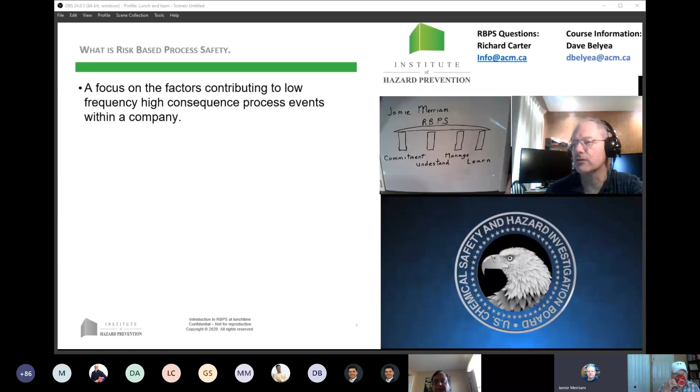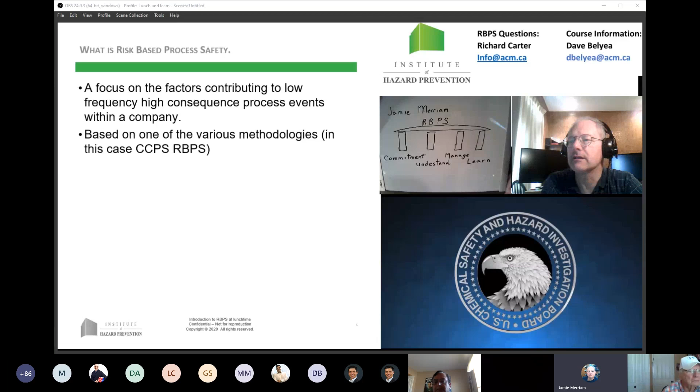Based on one of the various methodologies, we will interpret that risk. The one we're going to be using, or focusing on, is CCPS's risk-based process safety, but we'll be talking about other methodologies as well.

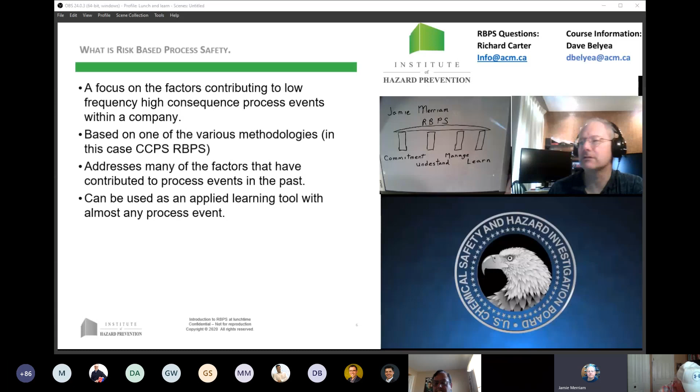We're going to address many of the factors that have contributed to process events in the past, and this can be used as an applied learning tool with almost any process event. What I'm trying to instill here is that taking some of these learnings and applying or interpreting them for your own use is highly encouraged. We want to make sure that we give process safety management leaders within companies the tools to help change the culture. That's really one of the key focuses of this Lunch and Learn session.

So key learning number one: most companies already manage some of these activities in process safety management. Sometimes they're called process safety elements, or elements.

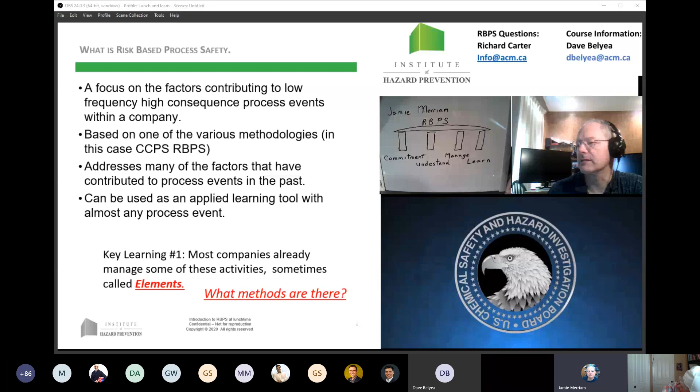Let's talk about those methods. The first one we're going to talk about, the structure, is the Guidelines for Risk-Based Process Safety from CCPS, or Center for Chemical Process Safety. I'm glad they have an acronym, because trying to say that quickly is very difficult.

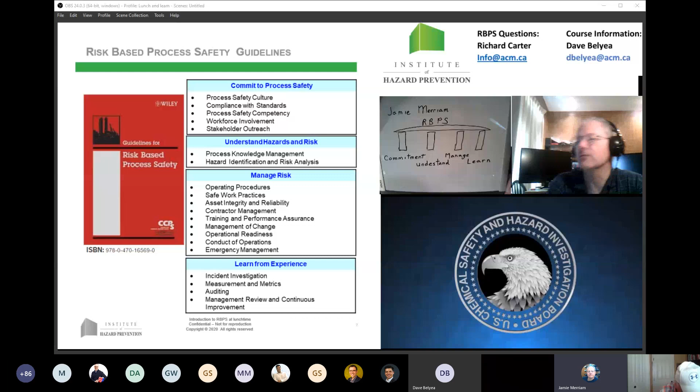There's two important learnings there. One is that using any of these methodologies, one can still implement good process safety management, and manage process safety within their facility effectively. It doesn't require, or I wouldn't say that RBPS is any better than OSHA 1910. So much of it is how you implement it within your facility. But don't be afraid to learn from various methodologies in order to enhance your layout of process safety management.

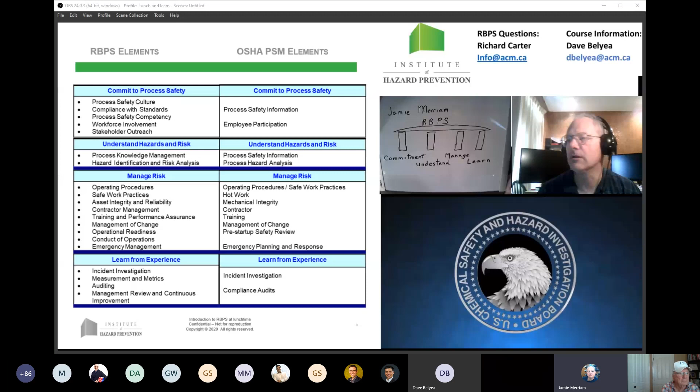If you're on the European side, you may be more comfortable implementing something like Seveso, but the results that you would get would be very similar to the other methodologies.

So safety case, as I mentioned, is commonly used in offshore facilities. I used to work on the East Coast, and this was something that was approached when we were looking at the deployment of the Terra Nova.

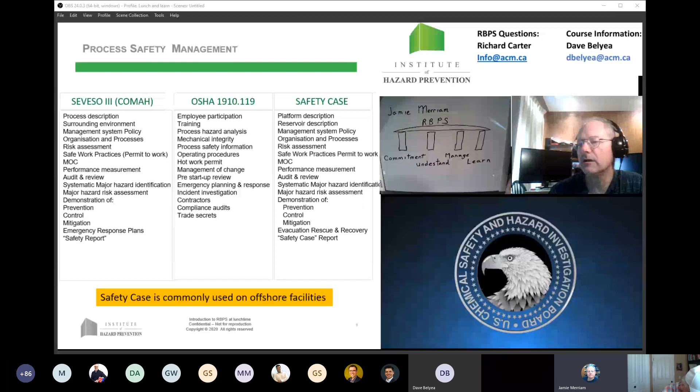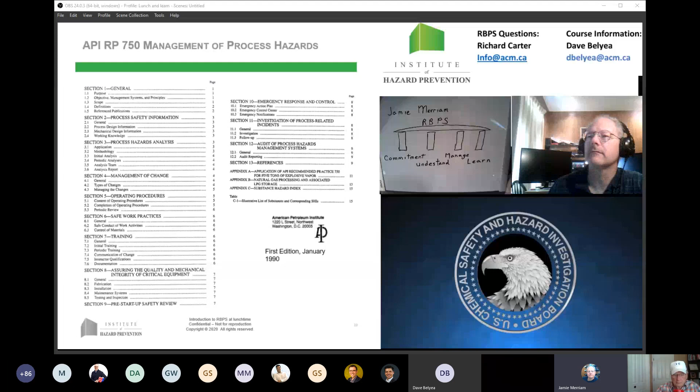Now, stepping a little closer to home, in Canada here, back in 2012, we saw the process safety management standard being deployed by the Canadian Society for Chemical Engineers. Not long after, we came out with CSA Z767-17. This is the, what do you want to call it, model for Canada.

It does parallel very closely with the risk-based process safety structure, and I'll be talking about that in a few seconds. But the key point here is that there's four pillars, which we touched on before, and which we'll get into more detail now.

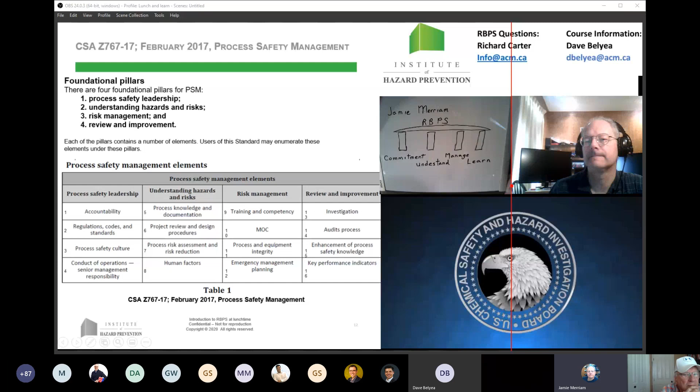When we look at risk-based process safety versus CSA Z767, we see that they are very, very similar. So one of the takeaways from that is that the publication for risk-based process safety is an excellent reference manual for some of the application of Z767.

Okay, now let's get into these pillars that I was talking about before. There's 4 pillars: commitment, understanding, managing, and learning. I really enjoy talking about this in this structure because this is a wonderful baseline for management discussion. Okay, we're talking 4 sets of deliverables.

Each deliverable has sub-deliverables. So if we can show how we're improving our commitment, making sure that we understand and manage the process risks, and learn from any occurrences within our facilities, we are going to be enacting very effective process safety management. Okay, now I've just shown you 4 pillars that look like they're made out of rock or something like that. What do we do with that? Well, let's talk about it.

Okay, first one, culture. My second favorite topic, but this one's worthy of a story. I'm also a tradesman, and at one point on the East Coast, we had a shortage of manpower because of things going on in other facilities. So I actually had to throw off my engineer's hat and throw on my tradesman hat and go out and work on the platform, or the FPSO, for a couple of rotations.

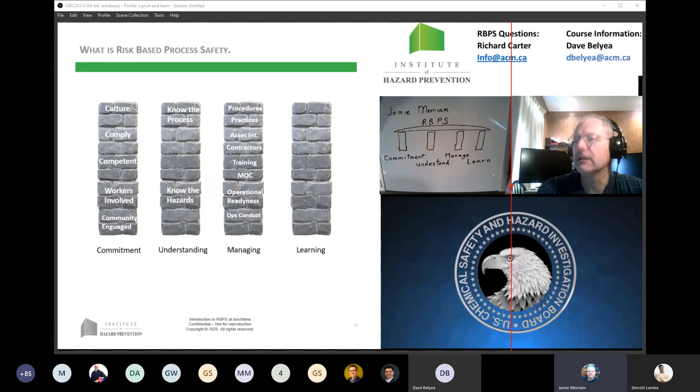Operator conduct means acting in a professional manner, but also knowing what to do and when to do it, and continually drilling this skill so that operators have the ability to know what to do when things are operating normally and what to do when things go off the rails.

All right, and I think there's one more.

Emergency response. When things do go wrong, both operations and maintenance people know what to do and how to respond. In a lot of cases, some of your maintenance people will also be first responders, so in the event of some type of emergency, they will initiate their response procedures and prepare to fight whatever problem there is.

Okay, and the last one. I talked about culture being my second favorite. Auditing is my absolute favorite, and it's not because I've got problems mentally.

Auditing to me is a tremendous way of having the ability to score how we're doing. Auditing says, how are we doing? What do we do next? Everything I'm going to talk about below auditing in this pillar is driving towards correction based on some type of investigation. And this should never be dealt with as a negative.

When I'm involved in auditing, I want to go in, interview people, and I want them to come out of that audit and go, wow, that was pretty good. And then when they see the results, go, oh, he's telling me how to do what I'm doing right, better. You always want people to be very forthcoming. You want to know what things are really operating like and find ways to improve.

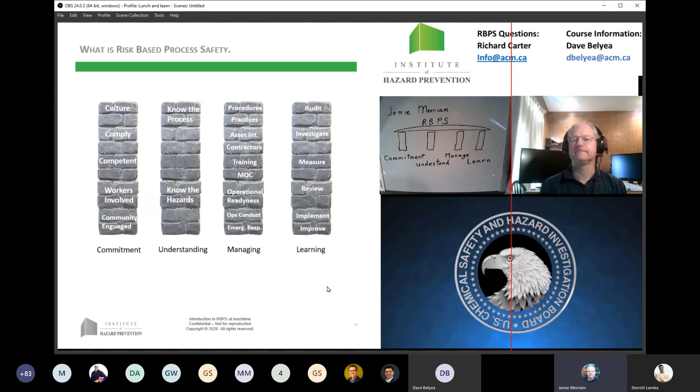Key learning number 2: risk-based process safety gives us the ability to know what is important, what you are doing right, and how to improve. That is really what the goal is here.

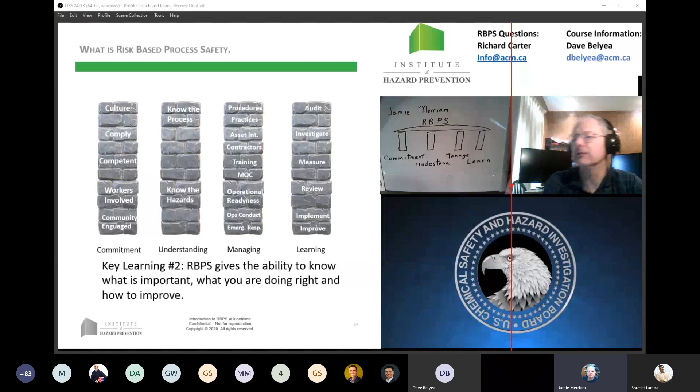So what does this all look like? What I'm going to do is we're going to take a look at this video and look at it from a risk-based process safety lens. It's a fascinating video, but the value we're going to get out of it is not just a passive review, but looking at how commitment, understanding, management, and learning apply to this video or sections of it. All right, let's go.

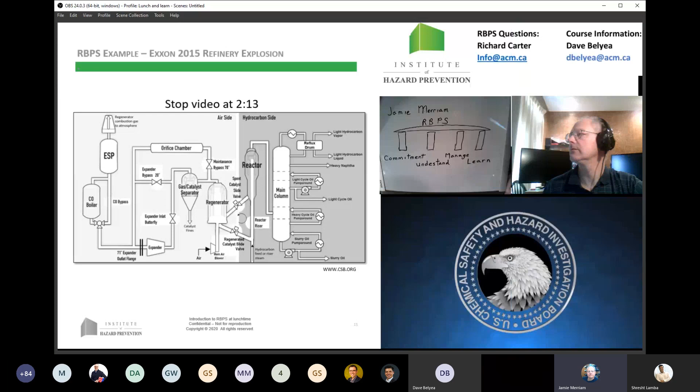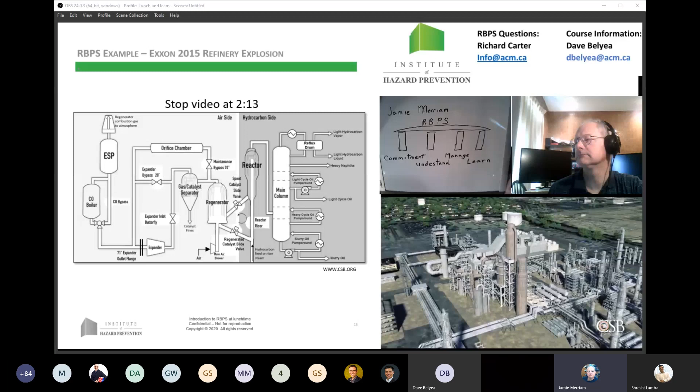The Torrance Refinery is a 750-acre facility located just outside of Los Angeles, California. At the time of the explosion, the refinery was owned by ExxonMobil. An important part of the refining process takes place in the facility's fluid catalytic cracker, or FCC unit. In the FCC unit, heavy hydrocarbons from crude oil are broken, or cracked, into smaller hydrocarbons, which can then be processed into gasoline and other fuel products.

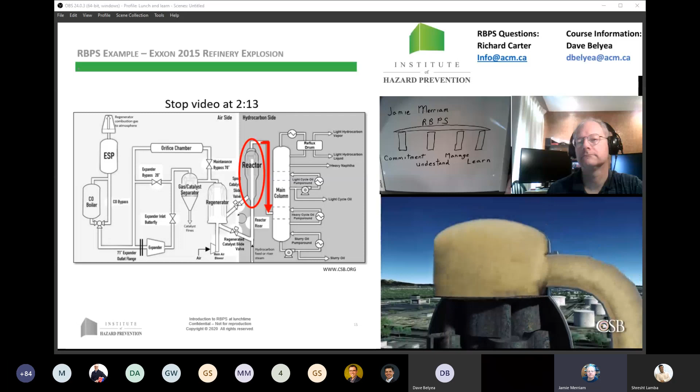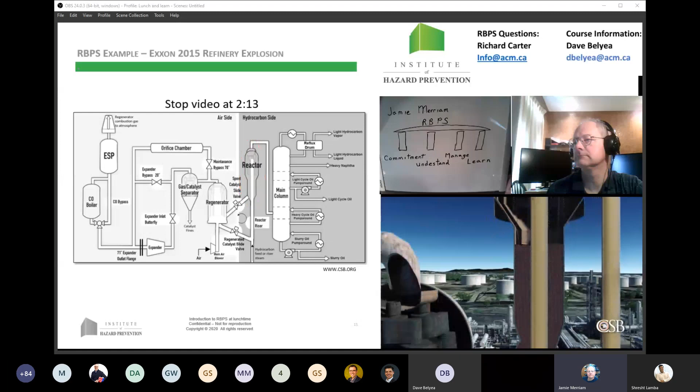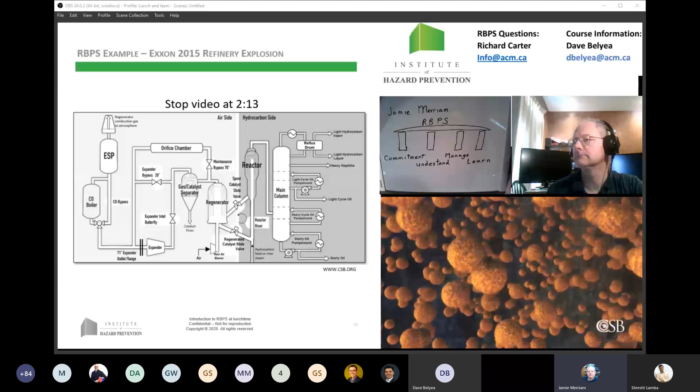The heavy hydrocarbons are first fed into a reactor, where they mix with the catalyst. The heavy liquid hydrocarbons are converted into lighter hydrocarbon vapors as they travel up the reactor. At the top of the reactor, the lighter hydrocarbon vapors are separated from the catalyst, then flow to the main distillation column. The catalyst falls down the side of the reactor, where it moves through a slide valve to a piece of equipment called the regenerator. During the reaction, a layer of carbon called coke forms on the catalyst that must be removed. Inside the regenerator, air is added, and the coke on the catalyst is burned off. The catalyst is then fed back to the reactor through a slide valve, and the cycle is repeated.

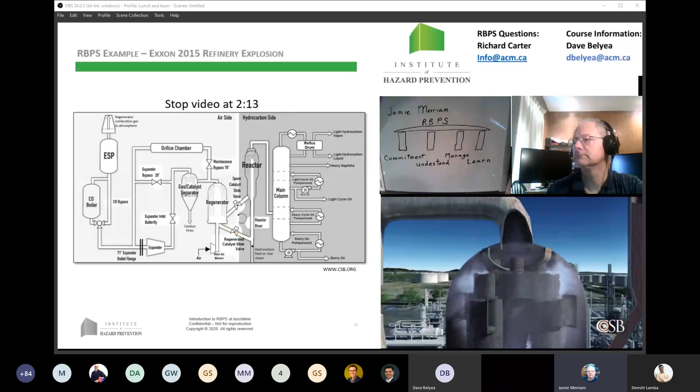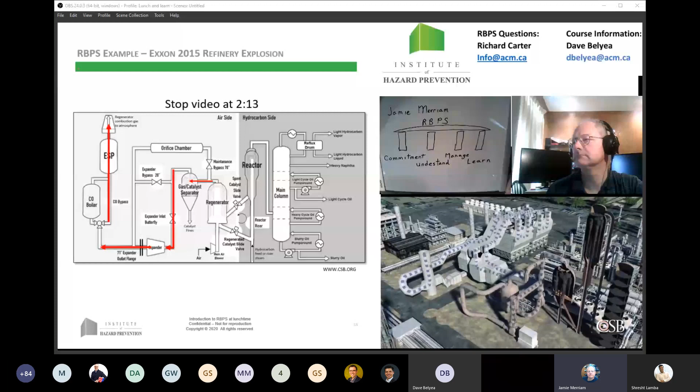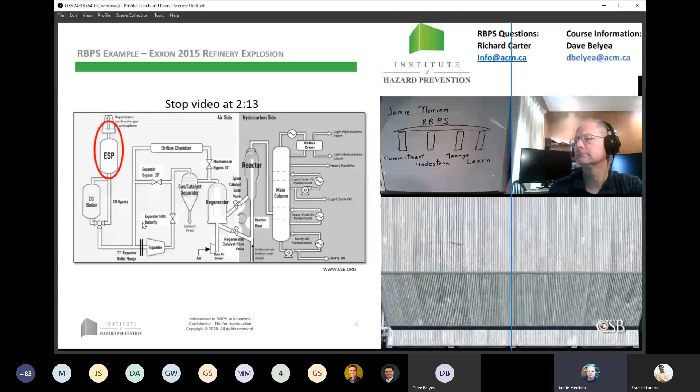When the coke is burned off the catalyst, this creates products of combustion called flue gas. The flue gas flows out of the regenerator and enters a system comprised of multiple pieces of equipment, which remove any remaining catalyst particles present. The regenerator and flue gas system comprise the air side of the FCC unit. The last piece of equipment in the flue gas system is called the electrostatic precipitator, or ESP. The ESP removes small catalyst particles using static electricity. While the ESP is energized, it creates sparks, which are sources of ignition. It is critical that the flammable hydrocarbon...

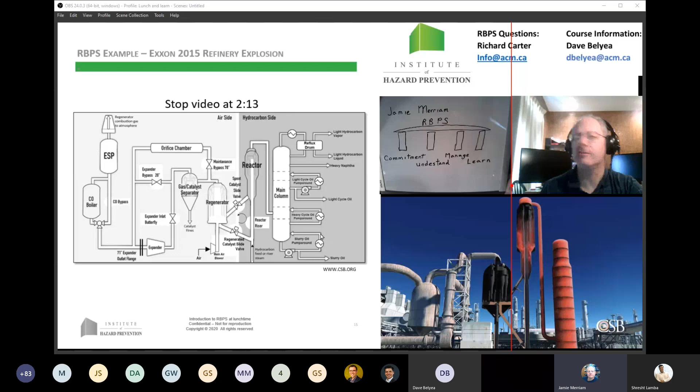Okay, we'll carry on with this in a moment, but now what I want to do is talk about what we just saw.

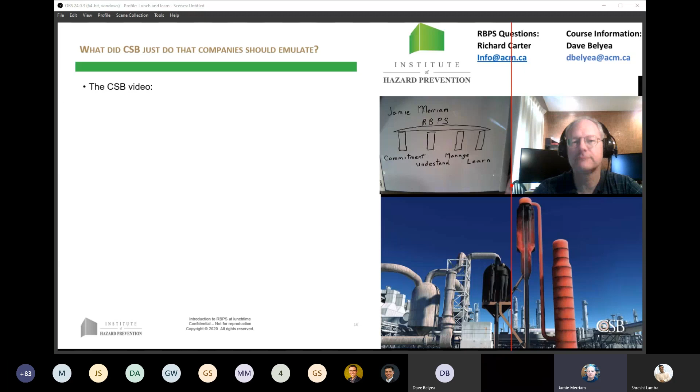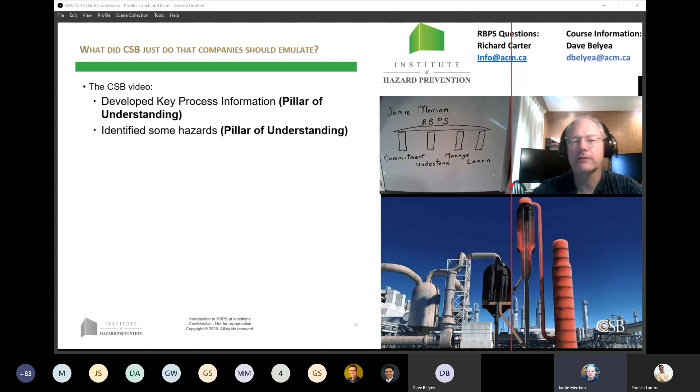So again, from a risk-based process safety point of view, let's see what the video did. First of all, it developed key process information, and that comes under the pillar of understanding. It identified some of the hazards, again focused on the pillar of understanding. We're creating an investigation here, so investigating what occurred falls under the pillar of learning. And finally, if we read the final report from CSB, we'd see there are improvements suggested in that report for other facilities, which again comes under the pillar of learning.

Risk-based process safety is simply a tool to ensure that we have limited gaps in our implementation of process safety.

It provides tools necessary to detect and resolve identified gaps as part of continuous improvement.

I wish I could instill to you the challenges in this, but don't ever get the illusion that a process is something that's static. There's always things changing. If nothing else, the inside of the pipe is being eaten away, which is changing the dynamics of the probability of some type of leak or rupture.

Rotating equipment is always wearing, and that's why we're always making sure that we replace bearings, that we replace seals, that we're doing for the vessels and the piping, we're doing some type of UT to make sure we know how much thinning has occurred.

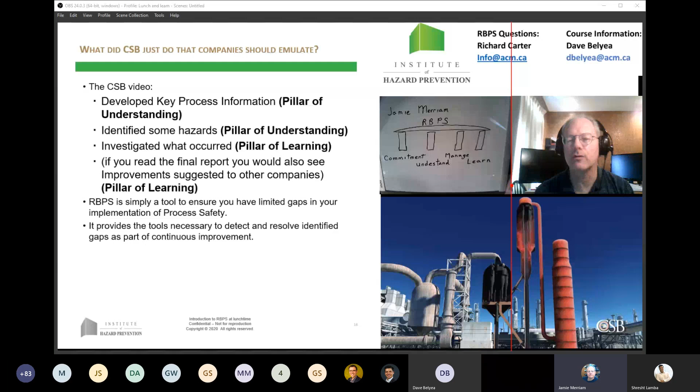Processes are not static. Even when we shut them down and there's no flow of materials through them, they're still degrading to some extent, and we have to make sure that we're always diligent and focus on continuous improvement in order to detect and correct potential process issues.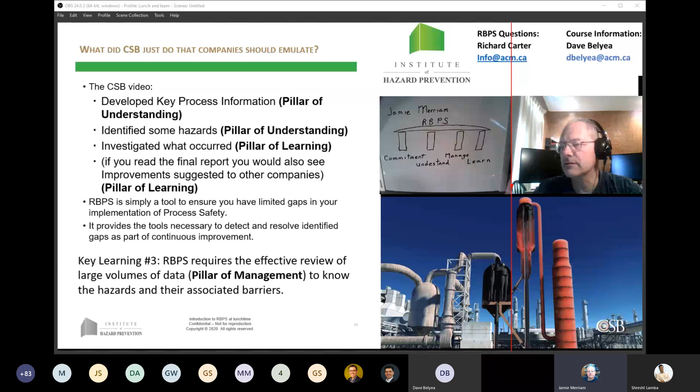Key learning number 3: risk-based process safety requires the effective review of large volumes of data, and this would come under the pillar of management, to know the hazards and their associated barriers. All right, and that comes back to this continuous improvement and this diligence.

Okay, so now we're going to go back to the video and watch as this process goes from what we'll call a steady state to an upset.

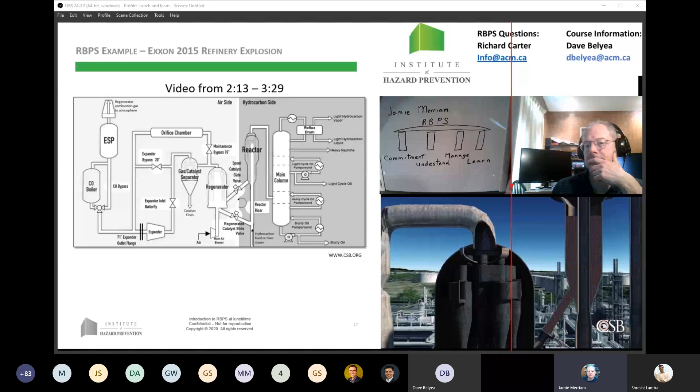Hydrocarbons in the reactor do not flow into the air side of the FCC unit, as this could create an explosive atmosphere. To avoid this hazard, the 2 slide valves connecting the reactor and regenerator are used to maintain a catalyst barrier between the pieces of equipment.

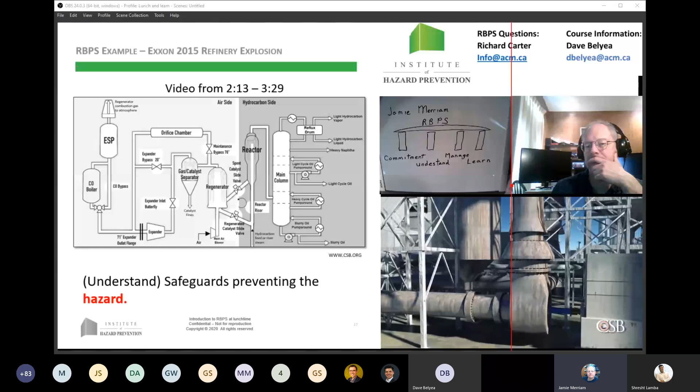The sequence of events that eventually led to the explosion at the refinery began on Monday, February 16, 2015, when a piece of equipment in the air side of the FCC unit, called the expander, vibrated forcefully enough that the refinery's control system automatically transitioned the FCC unit to a standby mode known as Safe Park.

During Safe Park mode, the flow of hydrocarbons into the reactor is turned off. The flow of air into the regenerator is also stopped. The 2 slide valves connecting the reactor and regenerator are closed to ensure a catalyst barrier is maintained.

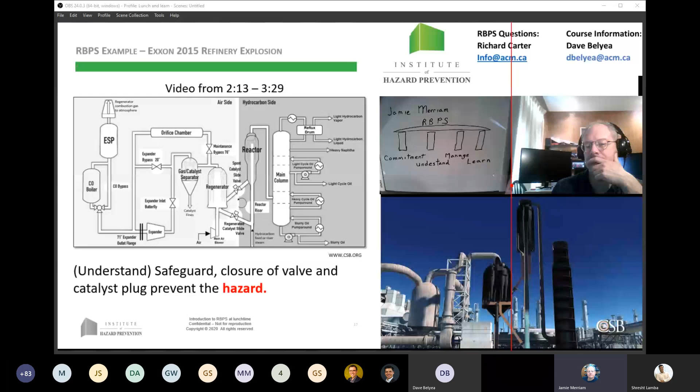Steam is then forced into the reactor to prevent hydrocarbons in the main distillation column from flowing back inside. The ESP remains energized during Safe Park. 1 slide valve, however, had eroded.

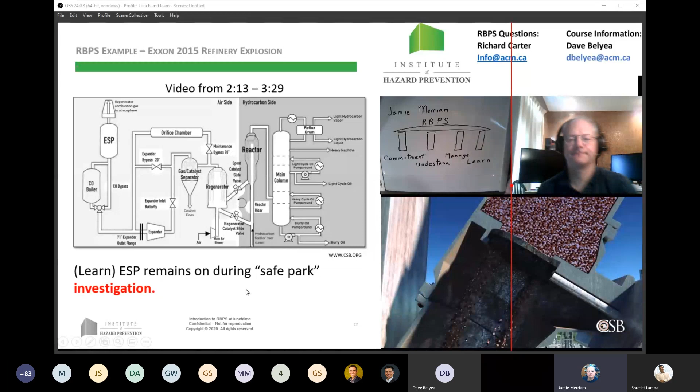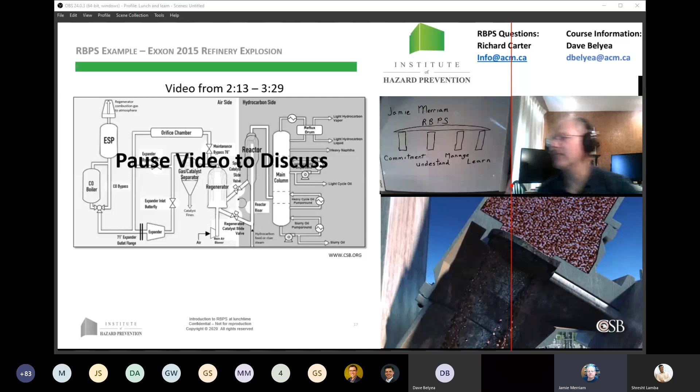All right. So we're now starting to see the events that led up to the actual loss of containment and the eventual explosion of this system. And I hope I'm not giving away the end of the story to anybody who hasn't seen this before. All right, let's take a look at this.

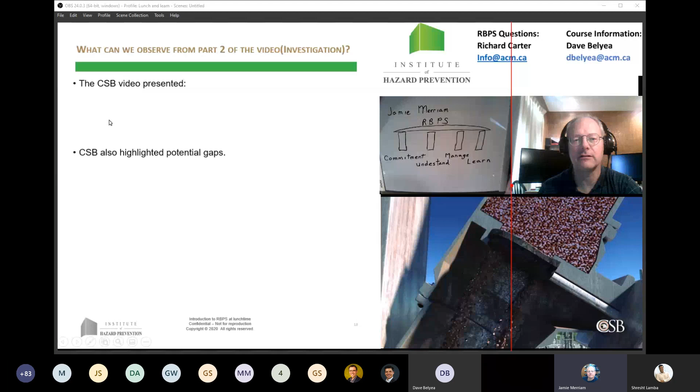So for part 2 of the CSB video, let's take a look and see what we observed. First of all, it started talking about the sequence of events. Okay, the expander vibrations, and then some of the other things that occurred based on the expander going into safe park.

It talked about some of the potential hazards, in this case here, vibration and potential damage of that vibration to the expander, which is what triggered the safe park. And finally, the safeguards, which was some type of high vibration trip.

And this is the interesting part. The high vibration trip resulted in other things being activated. In this case here, the expander goes down, the slide valves go closed to block in the

catalyst. But then, because of whatever risk assessment went on before, they said we also need additional protection. So they started injecting steam in to ensure that there's no way that vapors can make it and mix with the air, or hydrocarbon vapors can mix with the air.

Now let's take a look at some of the other things that were also highlighted in there as potential gaps, although not said so directly.

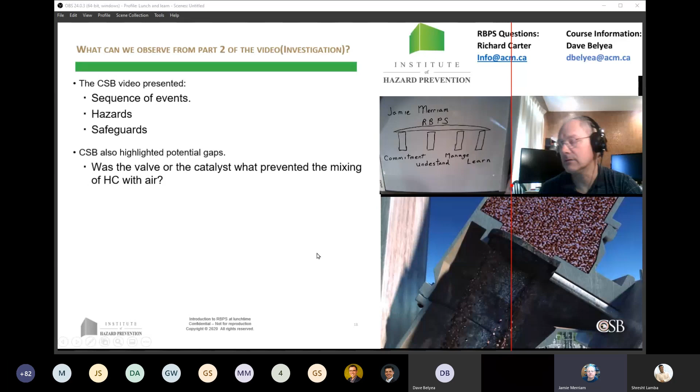Was the valve or the catalyst what prevented mixing of the hydrocarbon with the air? That's really not made clear in this video. And I would argue that the CSB investigators had a hard time figuring out what that answer was supposed to be.

Was the trip of the expander a safeguard or the cause of the hazard? Again, I think that depends on perspective.

The electrostatic precipitator continued to operate during safe park. Okay, even though two safeguards were activated due to the identified hazard of hydrocarbon and air mixing and potential explosion.

So I can't explore into this too deeply in a session like this, but it does beg the question, if it was important enough to do those two safeguards and we're tripping out the expander, why wouldn't we shut off the precipitator? And there may be a good reason for it, but it definitely is a question that's worth asking.

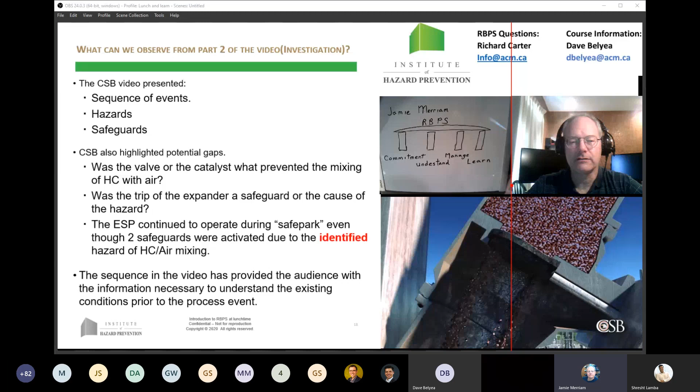The real thing I wanted to drive home is that the sequence in this video has provided the audience with the information necessary to understand the existing conditions prior to the process event. I really like the way CSB does this, because they tend to follow this formula quite consistently in some of their other videos. I'm hoping I can give you a bit more of a process safety lens when you're watching these videos, because they can be very good learning tools that you can customize and apply at your facilities to enhance learnings in a multitude of different elements of process safety.

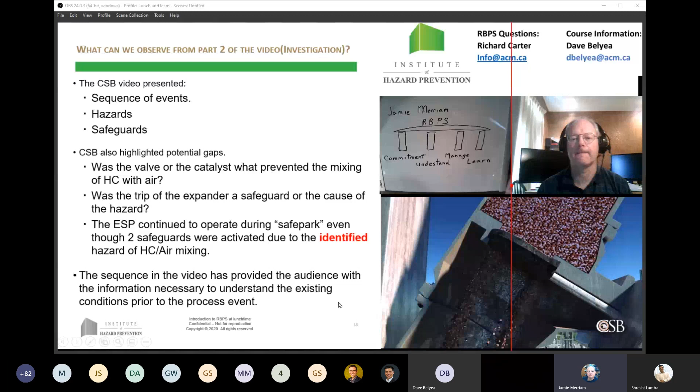Okay, let's carry on with the third part.

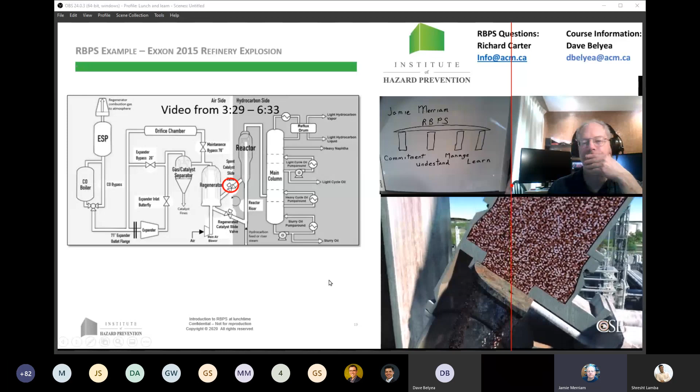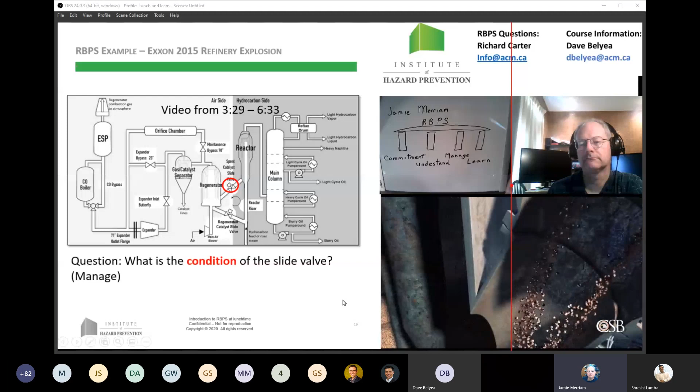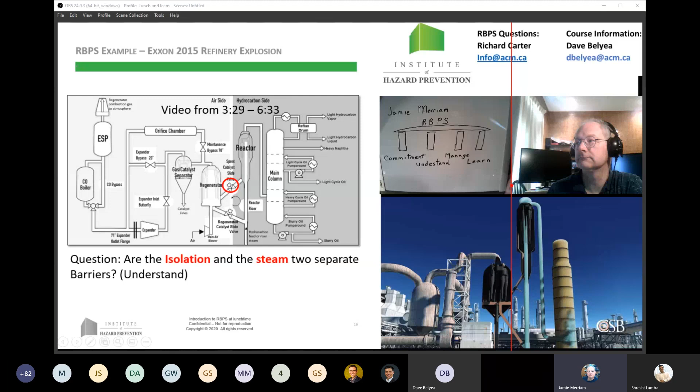Over 6 years of operation, even though it closed, it could not maintain a catalyst barrier in the reactor. Within 7 minutes of the unit going into safe park, all of the catalyst in the reactor fell through the slide valve into the regenerator. A direct pathway was created for hydrocarbons to flow between the reactor and the regenerator. But the pressure of the steam flowing into the reactor as part of safe park mode was high enough to prevent hydrocarbons in the main column from flowing back inside.

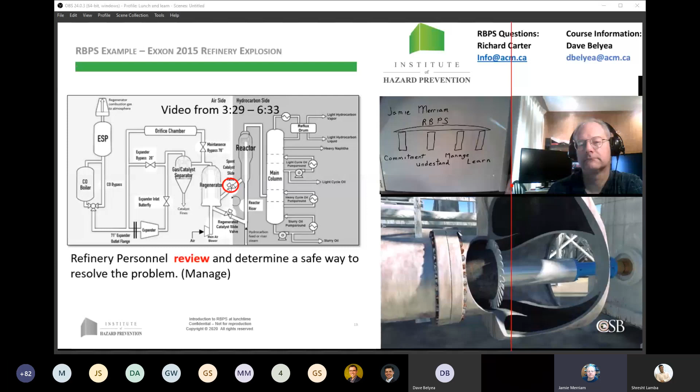With the unit in safe park mode, operators attempted to restart the expander several times, but were unable to do so. Refinery personnel met to identify a strategy to repair the expander and bring the FCC unit back online. Operations personnel predicted the expander could not restart because catalyst had likely accumulated inside.

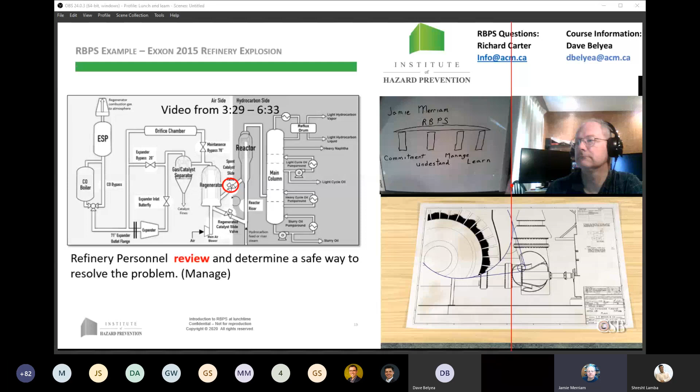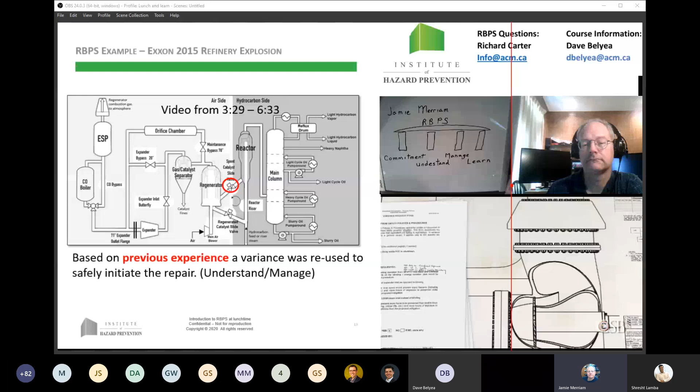On Tuesday, February 17th, a meeting took place involving a group of refinery personnel. The group discussed a similar expander outage that occurred in 2012, for which the refinery had developed what is called a variance. A variance is a management-approved deviation from procedure. The group decided to use the 2012 variance, which allowed a departure from the typical requirements for isolating the expander. Part of that process involved installing a blind in one of the expander's outlet flanges.

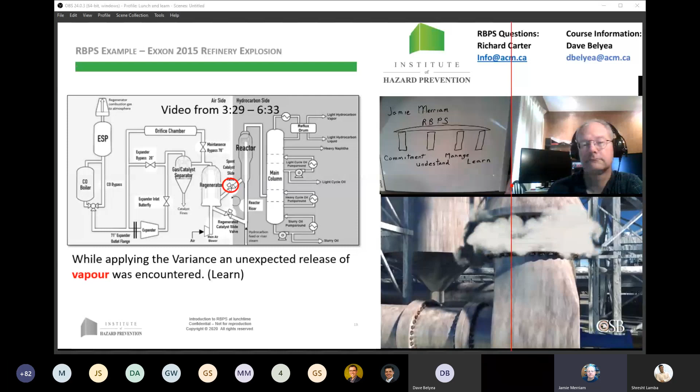On the morning of Wednesday, February 18th, ExxonMobil maintenance attempted to install that blind, but were unable to do so because steam was escaping through the open flange. Steam from the reactor had traveled through the leaking slide valve into the air side of the FCC unit.

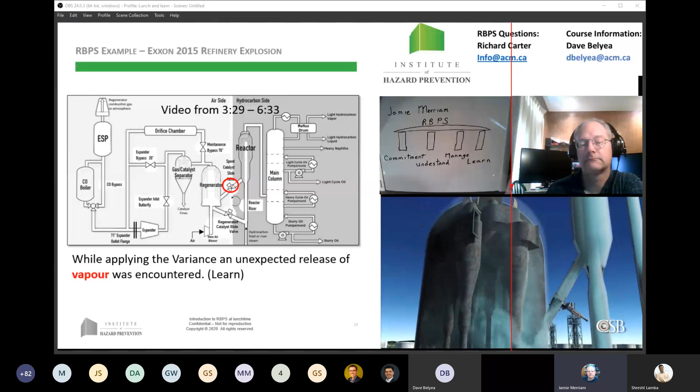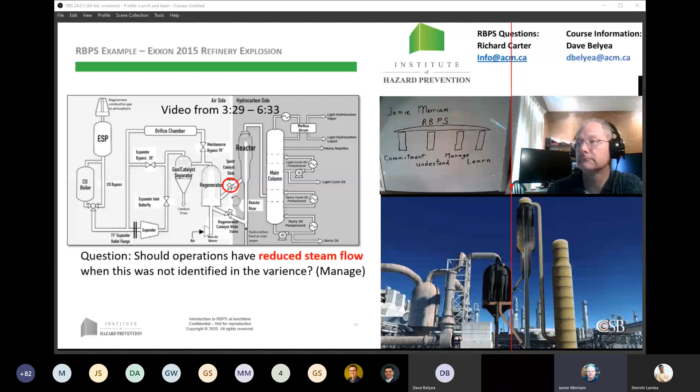Using the variance as a guide, the flow of steam into the reactor was decreased in an attempt to reduce the amount escaping from the expander. But the variance did not evaluate whether this flow rate was sufficient to prevent hydrocarbons from flowing into the reactor from the main distillation column.

Unknown to the operators, light hydrocarbons from a separate unit had flowed through a leaking heat exchanger into the main column, increasing pressure inside. With the flow of steam reduced and less pressure in the reactor, nothing could prevent the hydrocarbons from flowing back from the main distillation column.

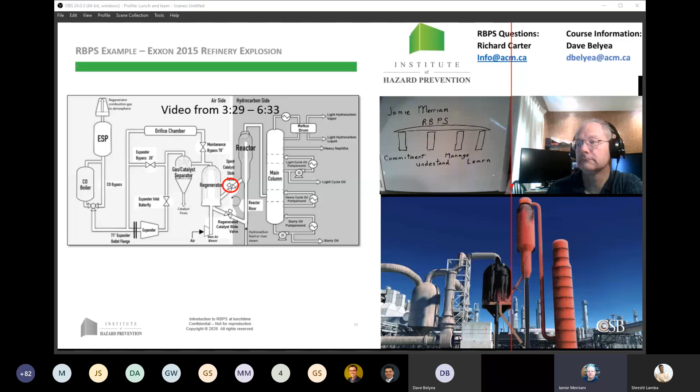The hydrocarbons flowed into the reactor, where they escaped through the leaking slide valve into the air side of the FCC unit. At 8:07 a.m., a maintenance supervisor working in the FCC unit received an alarm on his personal hydrogen sulfide monitor, warning. All right.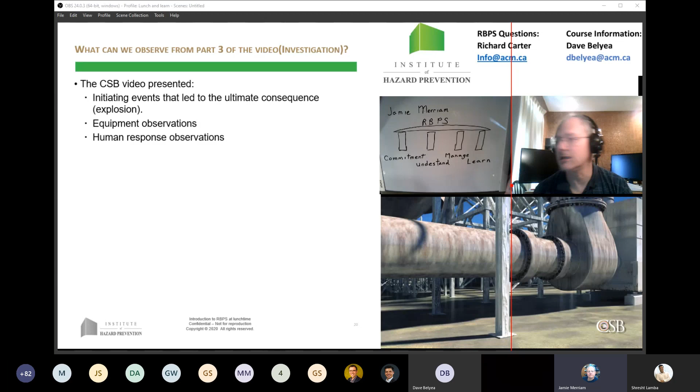Okay, so part 3. Let's see what the CSB guys were doing here. First thing we can note is that it showed the initiating events that led to the ultimate consequence of the explosion. It had observations on the equipment, both the failure of the expander and the trip, and then the failure of the protective function of the slide valve and the catalyst. But it also showed us many of the human responses that occurred leading up to the actual event, including that final one, which was the detection of gas in the area where the work was being done.

Again, it also kind of touched on some potential gaps. When to use a variance and when are conditions outside of the variance's applicability, okay? It didn't specify that, but it begs the question, when something occurs that's outside of what was listed in the variance, what do you do? And again, that maybe partially comes back to humans, it comes back to training. There's many different elements that it impacts.

What did the high vapor flow from the expander flange indicate? Well, again, I wonder if there's something in that variance that would say to them, you know, this is based on cracking the flange and putting the isolation in under normal conditions.

When you have a significant amount of steam or vapors escaping when you crack the flange, that is not a normal condition for installing a blind. What should have occurred prior to reducing steam flow? In this case, the catalyst and slide valve were deemed adequate based on normal isolation requirements documented. Now we're taking one of the protections that was put in there, the steam flow, and modifying it. Considerable thought had gone into these protective systems, and now we're defeating them. We have to wonder whether the ramifications of that were fully understood.

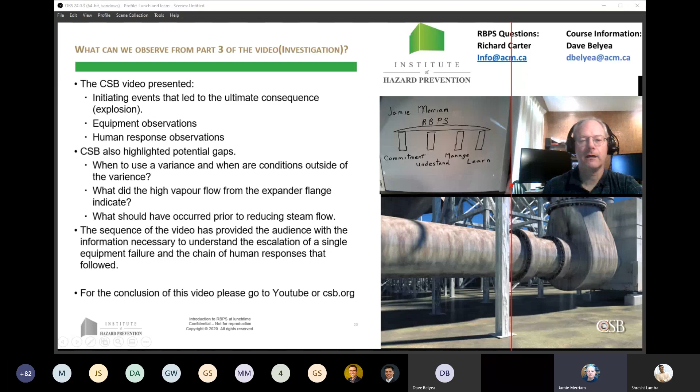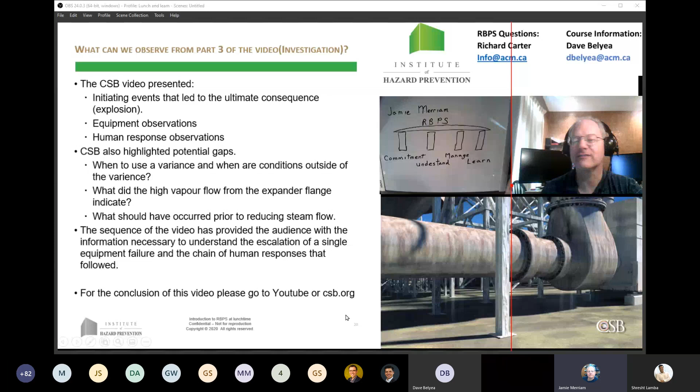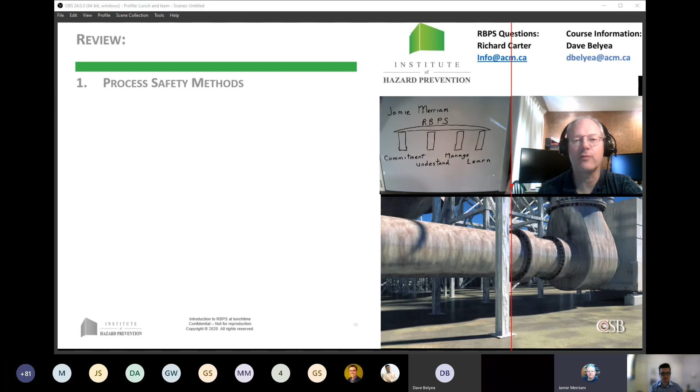So what have we gone through today? First, we talked about the fact that there are different methodologies for applying process safety management. All of them can be valuable to a company. I don't really have a preference for any one of them. Process safety enhances your company's current good practices, and that's really important. You do not want to continue to reinvent the wheel. There's no real value in scrapping everything you're doing. Take what you're doing right and enhance it. You're always going to get better traction with employees and management, because that means the investment you've made in process safety up until now has value. Let's try to find a way to take that value and optimize it.

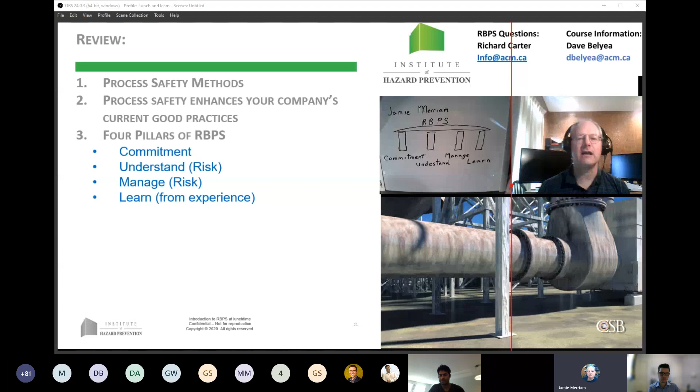Four pillars of risk-based process safety. The first one being commitment, from management and also from all the people underneath them, understanding where you're coming from and where you're trying to get to with your risk. Managing your risk in a way that is effective, and learning from your experiences. I can't drive that learning hard enough, because it gives us the ability to, number one, know where we are, and number two, take that and with the commitment from leadership, understand where we want to get to.

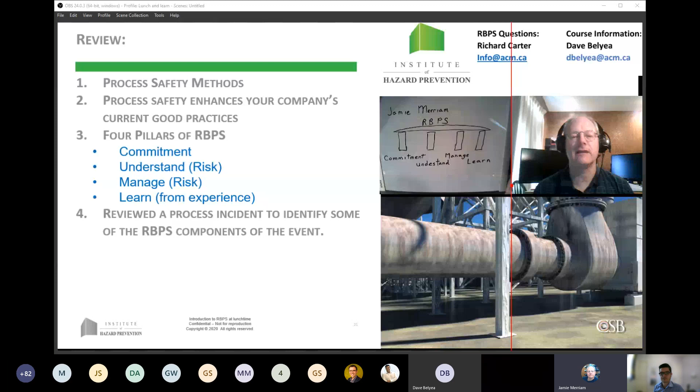Then we reviewed a process incident, identifying the risk-based process safety components. I hope you found that effective, and I hope it's motivated you to use your energy to take some of these CSB videos, which are excellent, and use them to maximize the value of the learnings for your company.

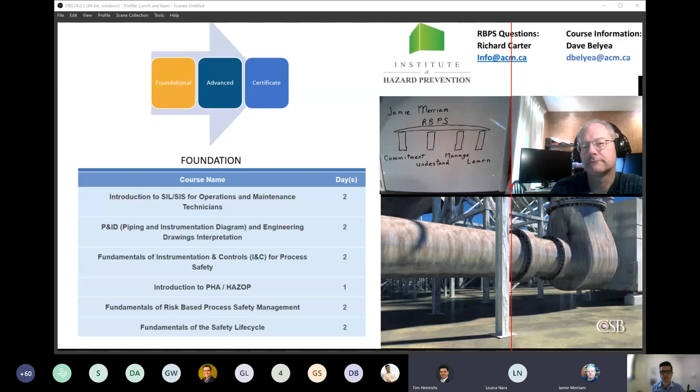Talking a bit about remote training and the opportunity to continue your personal and professional development programs, to learn more about process safety and practical applications of the CCPS RBPS program. All of our courses are geared around that philosophy. We've got a wide range of courses available through the Institute, all available now remotely.

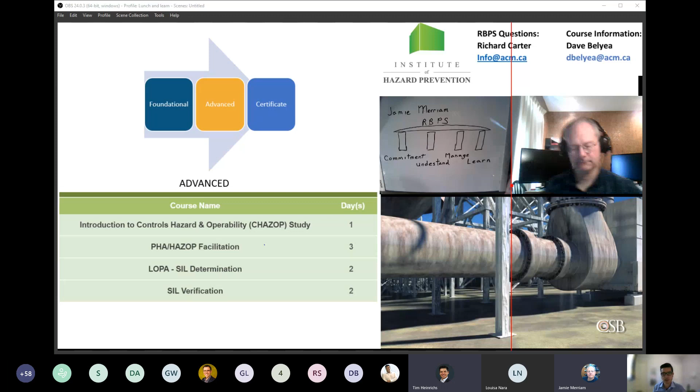The next slide covers the TÜV Rheinland Functional Safety Engineer certification. For those making a career in functional safety or process safety, there are two designations you can achieve through the Institute: one in process hazards and risk analysis, where you can become a certified functional safety engineer in that area, and the other in the development, installation, maintaining and commissioning of safety instrumented systems, or SIS. These are two very prestigious and globally recognized accreditations people can work toward.

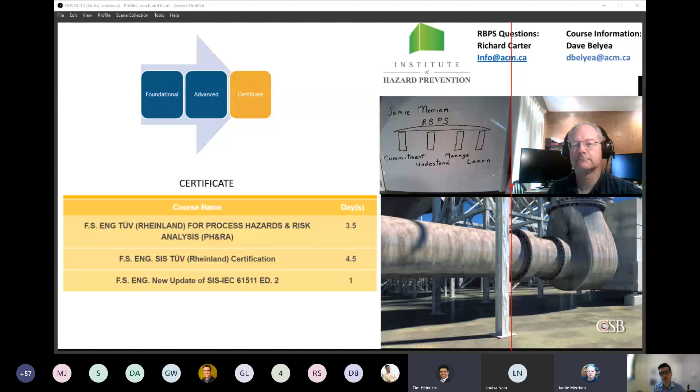This is something a bit new to us: we decided to offer some cost incentives to encourage people to take this time, as we're hopefully on the tail end of the pandemic and coming out of it, to continue their professional development programs and leverage these courses. So there are some offers available, and we'll get all this to you folks in an email. If you're trying to jot this stuff down, don't worry about it too much, just keep an eye on your inbox.

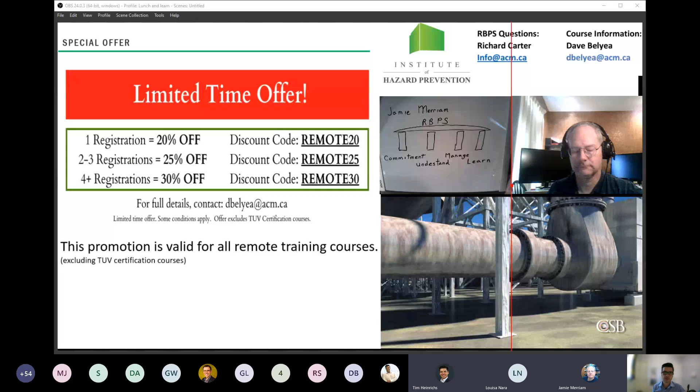For anybody who wants to learn more about the courses we have, our risk consulting services, or our analytics technology, we're doing a lot of work right now to help people. It's the right thing to do. We're all in this together through the pandemic, managing all the risks popping up because of changes in the way we're doing business and the way facilities are manufacturing their products. Risk Alive is offering a lot of gratis, no-charge analysis of data, something very easy for operating companies to take on through the Institute.